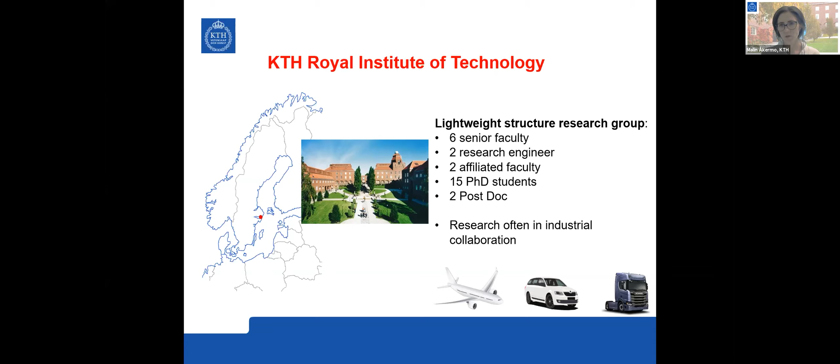We have 2 affiliated faculty from industry working closely with us, and roughly 15 PhD students and some postdocs. Some of the PhD students are also employed by industry, so we make no difference whether they are industrially employed or working at the campus full-time. We have all the same requirements for becoming a PhD. As Olle said, we often work in collaboration with industry and towards different applications.

I wrote this title for the presentation quite early, and now I have to live up to it. So I was thinking what to say, and we have heard quite a lot already, and I'm afraid some of that will be repeated with other words from me. Talking about composite manufacturing and future lightweight design, I think we all understand it needs to be cost effective. It has to include several different materials, still ensure sustainability, and in the future it also has to deal with multifunctional materials and structures.

So with that said, these are the 3 topics that I will actually talk about, trying to explain how I see these things today and in the future, what we do today and what we will do based on what we have learned.

So we will talk about cost effectiveness to start with. We are a university, we do not know a lot about what it costs to have an industrial application, of course. But in order to understand what is important to work with, we have had a research program around predictive technical cost modeling, where we try to see what kind of different manufacturing processes there are and what can be produced with them, how fast are they, how many components can we make an hour, depending on how complex the geometries are, and make a cost model based on that.

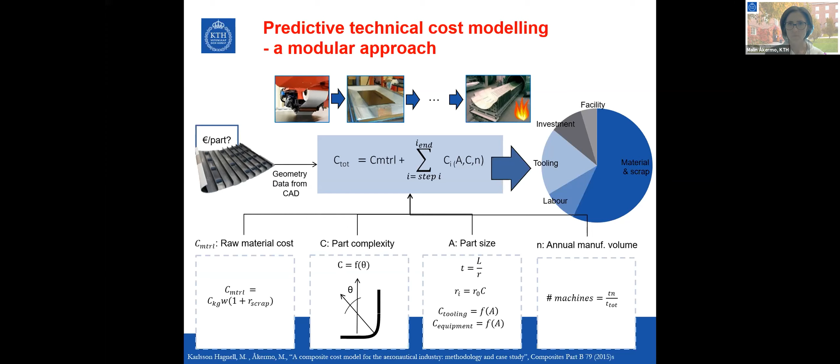So to me, cost effectiveness is to find the right level of automation for the material, geometry, and production volume required, and I think that's what we have heard with different words during these presentations. When you have that level of automation that is best for you, you need to learn the process window for that process so you can really use it to its full potential.

And then also, of course, ensure robust manufacturing and small geometrical tolerances to enable low-cost assembly.

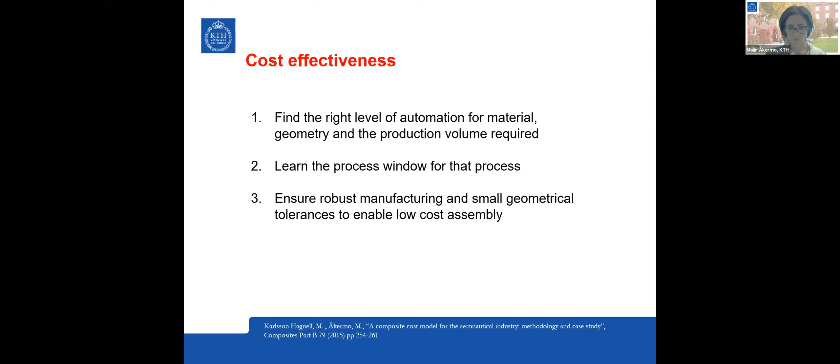So now I will come deeper into these points, telling what we did, how we started, and where we are going right now. Although we said that we work towards different industrial disciplines, I think lately, since I started at KTH, we have worked mostly towards aerospace components. Therefore, I will start with a typical aerospace geometry, and we will look at how we have worked on the kind of automation around that.

To us, a typical aerospace geometry is quite large. It has a flat outer surface and a lot of stiffeners, which include ramp areas, recess areas, and convex areas. So the flat area itself is fairly simple, while the different geometries can be quite complex. You see there what we call the test geometry—we also call it the Per beam, because of the PhD student who started working with it. That geometry will follow through this presentation.

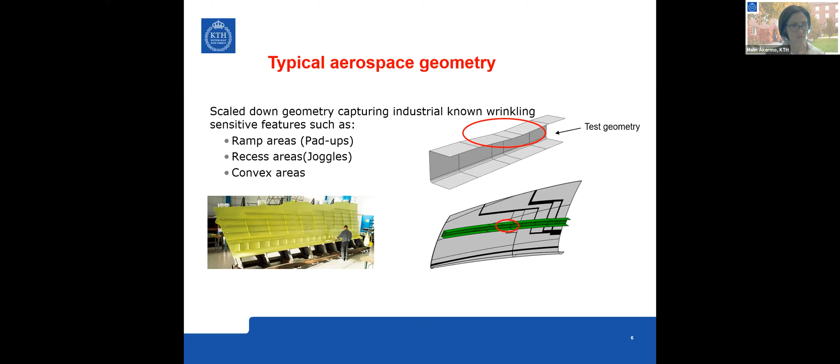The level of automation we have been looking into for this particular case with the surface and the stiffeners is that we make multi-layer layups using an ATL or AFP flatly. The outer surface can be made directly, of course, but we focus here on the spars.

They can be laid up flatly and then afterwards formed in something called Hot Drape Forming, which is a process where you put your material as a stack on the tool, with a rubber. You heat up the whole thing, and when you have the right forming temperature, you take out the air, and the pressure from the rubber will form the geometry towards the stack.

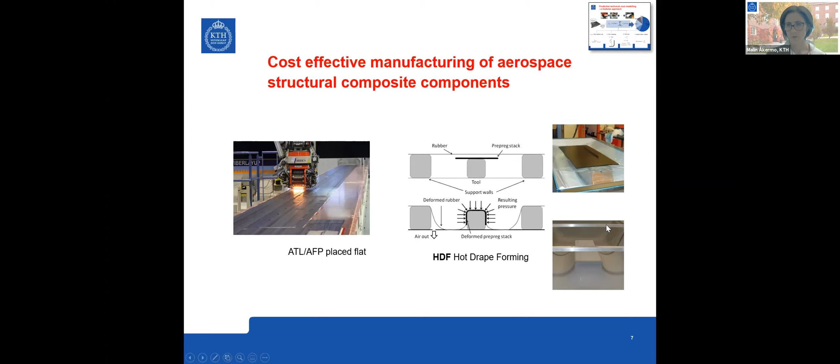You see pictures here to the right. The aim of this is to produce wrinkle-free and robust manufacturing. It's very efficient, and you do it the same way every time, so it's not labor dependent.

This is a technique that Saab has been using since 1980 in different fighter programs, but with time, more complex geometries have come into focus.

When we started looking into this, we had this particular case with the beam, where we saw that if you have a 45 plus minus 45 layup, as in the top figure there, and do a Hot Drape Forming, we get a really nice geometry. The beam is flat, but it has a recess zone here, meaning all the material formed down from that side and towards this will be under tension here.

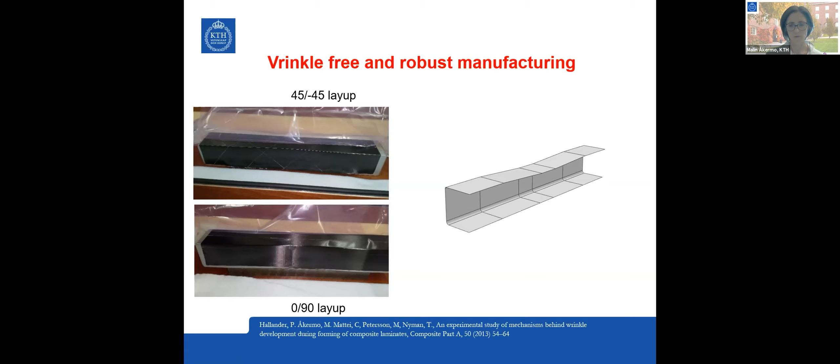We also saw that if you have a 0 or 0-90 layup, you got really nice geometry afterwards. However, if you stack those two layers together, plus 45 minus 45 with 0-90, the forming comes out with severe wrinkles.

So these wrinkles do not depend on too much material in this area, not primarily at least, since this distance is longer than that distance. So the wrinkles come from the different movement of the different layers.

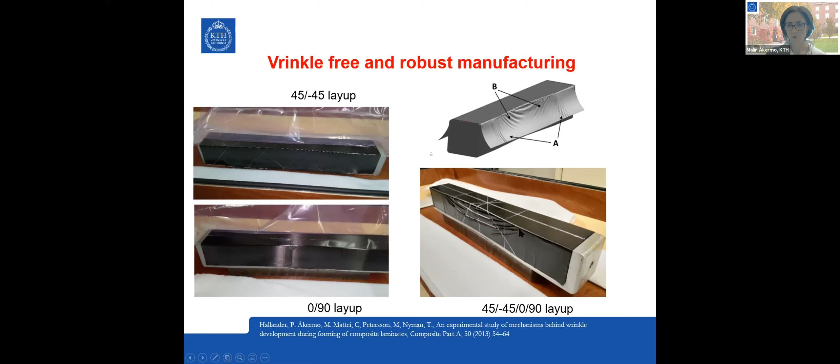We have defined different kinds of wrinkles, including micro wrinkles that depend on how these layers interact at the micro level. Based on this, we started looking into the forming mechanism, trying to understand why this is happening.

We have mainly looked at interply properties, the properties in between the layers, and how the material shears. We developed a material model and put that into forming codes.

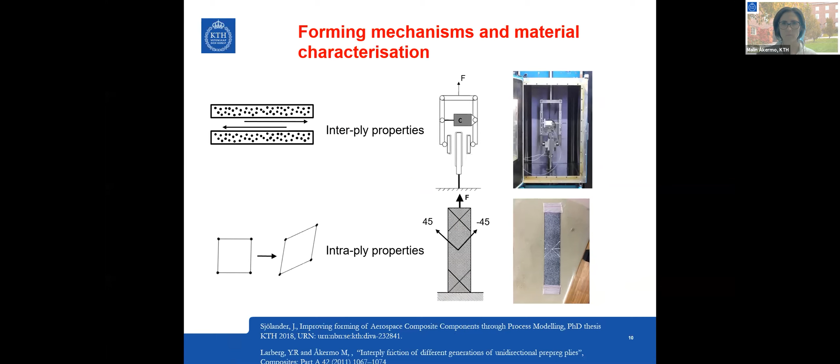We used the AniForm composite forming simulation tools and developed detailed material models, being able to both predict wrinkles, as you can see here, the very small wrinkles on the inner side.

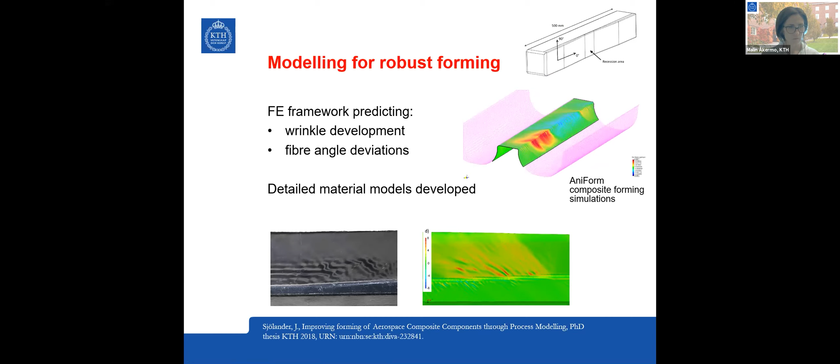We can see them as stress levels in the simulations, but also see exactly which kind of fiber angles come out after forming. Based on that, we can actually understand and predict why this behavior happens.

We saw that if we have 45 minus 45 and 0-90, and you form the pairs separately, you have no wrinkles. But if you start putting them together, you will have wrinkles.

We could also simulate and show that instead of forming 2 layers at a time, if we put everyone together but forced the layers we knew gave good results to work together, trying to make the interface between the different stackings weaker, we could achieve the same good geometry as when we did them 2 by 2.

So the simulation could help us understand what happens, and we could verify it. This is quite important for the future, so that we can use the simulation before doing a lot of experiments, and use them early in the manufacturing phase.

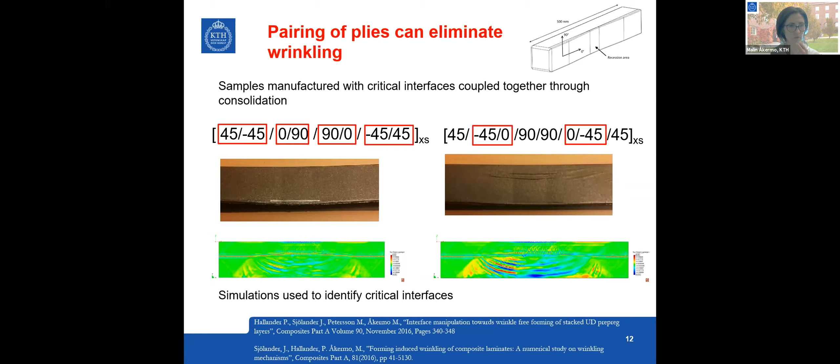Based on this, once we understood how everything was happening, we started looking into robotized forming, because a lot of geometries are still produced manually in the workshop today. It's quite heavy work for those doing it, and it's a quite bad work environment - they can be really worn out in parts of their bodies.

So we started looking into the initial structure we had, the beam, which we knew gave wrinkles in certain layups. We thought that since the hot drape forming technology is not that easy to steer, the rubber goes down and the material follows.

If we instead could find a better forming method, a forming order with a robot, we could avoid these wrinkles. So that is what we did. We did the bad stacking without any twisting of the interfaces, and we predicted how the robot should move in order to avoid wrinkles. We managed that way to produce a geometry which was 5 millimeter thick, I think 16 plies or something, without any wrinkles. So this could be a way of releasing the work for people in the workshop for those applications when you cannot use hot drape forming.

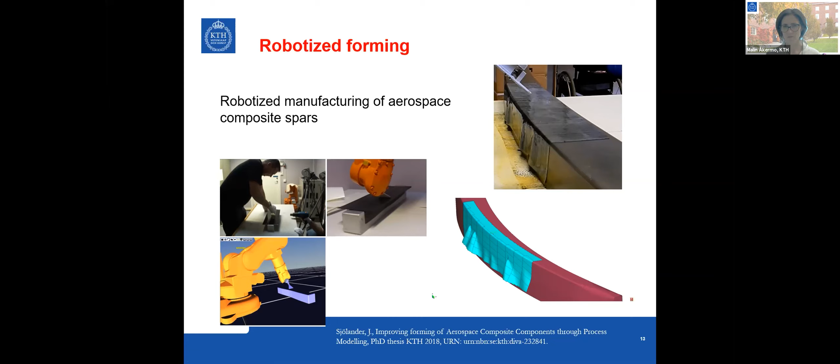So where do we go now with our technology that we've developed, the forming simulations and the understanding of the mechanisms? Well, the next thing happening here right now is...

We are collaborating with Volvo Cars, who are designing the Polestar car. Polestar is its own brand within the Geely family, as well as Volvo, but they are doing this design. You can see that in the bottom plate, the lower part of the structure is very similar, the Polestar 1, to the Volvo platform. It has, however, a few carbon fiber reinforced plastic parts, and the upper body is also made from carbon fiber composite materials, which is put together adhesively.

So this is not a car I can afford. There's another Polestar 2, which is mostly metal, which is a little bit more affordable. So these are all electrical automotives.

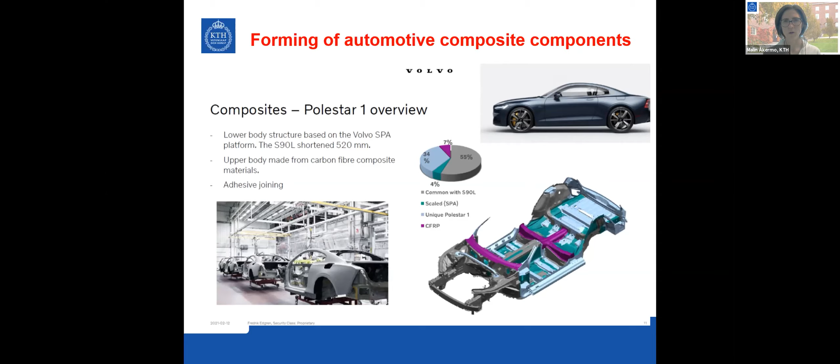However, the requirements from Volvo are quite big. I mean, these are the kind of simulations and tests they are doing. They are testing, of course, a lot of cars, which is costly, but in their design, they must be able to predict what will happen. So the simulations are there first, and then they just verify that the simulations are correct.

And in these simulations, they must have the correct fiber angles, and they need to know if they have some fiber waviness here and there after press forming. So right now we are looking into how to give them better material models for pre-preg press forming, so they can put that into their modeling framework for crash simulations and component design.

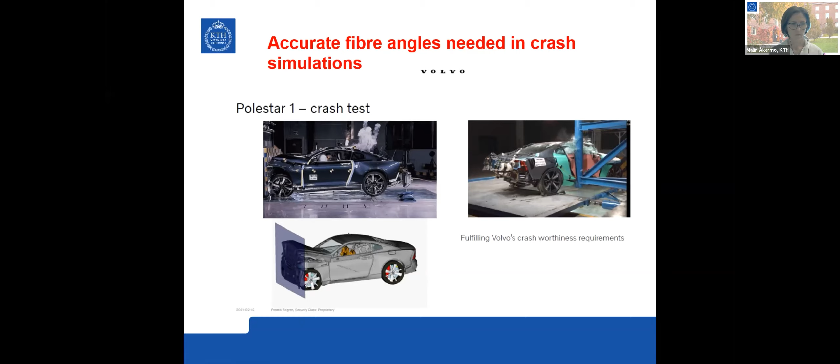So when we did understand a little bit more of how this worked, how the forming, why we got wrinkles, etc.

When we did hot drape forming, we felt that, well, why can't we push this a little bit harder? I said before, you should find a processing window for your application, your automation process. So we started looking into whether there was a possibility to, instead of having the hot drape former, use a Quintus press, which is very similar, but instead of evacuating the air, you are actually using oil to press the membrane down towards the tool. So it goes very fast and you get a really high pressure.

And the hope with this technology was both to be able to produce components faster, but also, since we had such high pressure, we were hoping that the voids would disappear, so we didn't need to go to autoclave for curing.

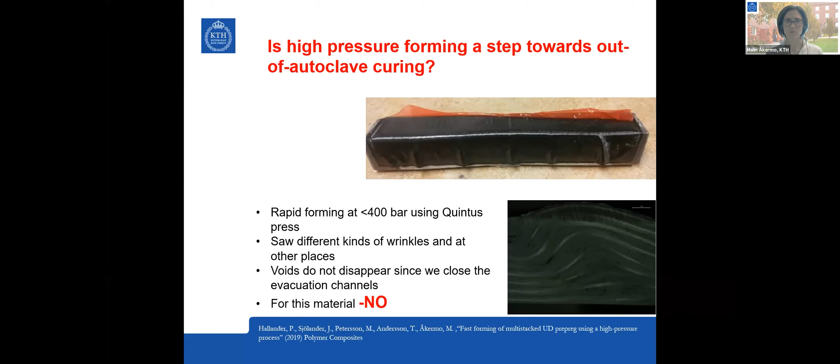When you had that, I said that you need to ensure that you have a good robust process and that the different parts fit well together. I'm basing that on the predictive cost modeling tools that we developed - we also looked at the assembly process. When you have an assembly like this with a lot of different spars that has to fit well together, it's easy that small shape distortion or radius thinning will make the fit not good enough, and you have to go to other activities to ensure that they fit within aerospace standard. We saw that actually, if you have to do this, it adds up to 30% of the total part cost. So this is important, of course.

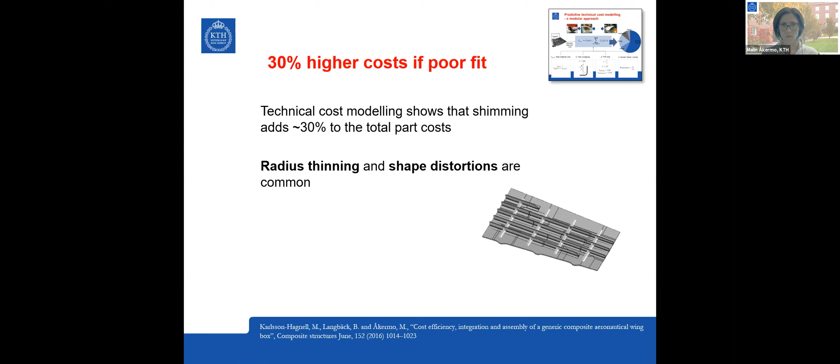Since we were mainly looking at the hot drape forming process, we started looking at what happened there. We found that when you form different thicknesses of material, so hot drape forming 8 plies, 16 plies, or 32 plies, at different radiuses using hot drape forming, we have the 2 millimeter radius and 6 millimeter radius. We could see that we had a certain change in thickness, which was quite large during the forming, if you compare it to the uncured thickness.

During curing, you also had a small change in thickness, but it was not at all as large as during forming. The total afterwards was often quite close to the thinning that we got during forming.

So with that said, we do not need to put a lot of effort into the bagging during curing, because you always have to do that - that was a bad way of saying it. The focus here is to understand that the thinning has already happened during forming. So if it happens during forming, we also need to understand how we can avoid it.

Looking at one of the pictures - this is a really bad picture from a high pressure forming experience - if you start looking into different thicknesses of the layers here, you find that where you have the fibers going in this direction, the thickness has to remain more or less the same, because it's difficult to move these fibers. While the other layers, where you have fibers going into the picture, so to speak, they had a tendency to move during the forming operation.

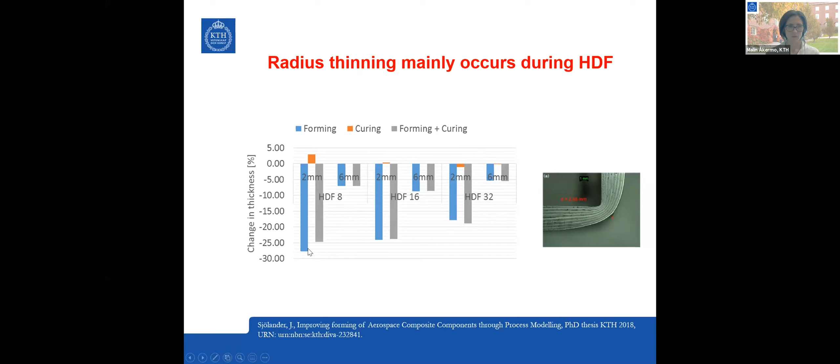This study has boiled down to a conclusion where we've decided that for these kinds of beams that we are producing, you should actually only heat as much as you need at the area where you need it. So heat the flanges only, and if we then keep the radius cold, or at room temperature or even lower, we can actually maintain the thickness of the radius.

Since we only heat a very small fraction of the component, we can make the heating process much more effective. So heating simply the flanges in different ways, single-sided heated or double-sided heated, we have done heat transfer modeling to verify this - the studies we've done.

We see that we get much smaller radius thinning than we used to have - 4% - and we have reduced our heating time by up to 85%, while still having a robust production.

Now we are heating by doing conduction heating with heated plates. I can foresee that there is even more time to cut if you go for some other heating technology, perhaps local microwave heating, or even better, some induction heating using new technology available. But with this technology, simple conduction heating, you can gain quite a big cost reduction and improved quality, which is important.

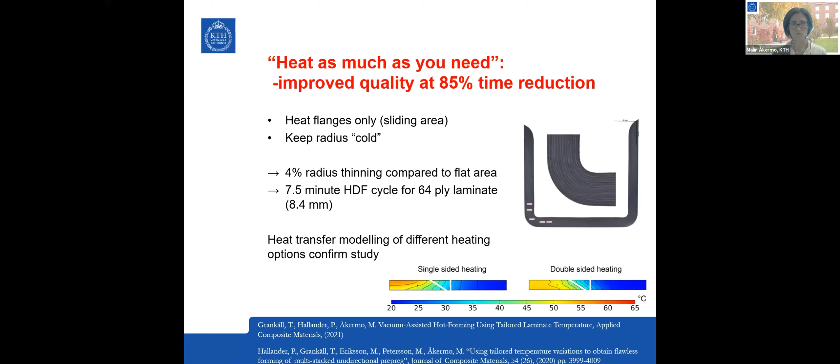The second step, considering having good control over geometry, considers producing these spars. If you have a lot of spars that you want to join, they can't have an outer surface that is rough.

And if you cure them on a male tool, a convex tool like this, it will have a bagging side here which is rough, and you will have poor fitting in between. It's preferable to cure it inside a female tool, having the outer surface shining and flat, and thereby be able to put them together.

However, the uncured thickness - if you lay up a lot of materials like this in the ATL or AFP, there is a bulk factor that remains after forming, which needs to be taken into consideration when you put it into the female mold. First of all, these steps from flat layup to putting it up on a convex mold are simple.

If you design this concave tool precisely the size that you have here, then you will get into troubles when you try to force it into the geometry. As soon as the material softens up and you debulk the material, you will lose the pressure.

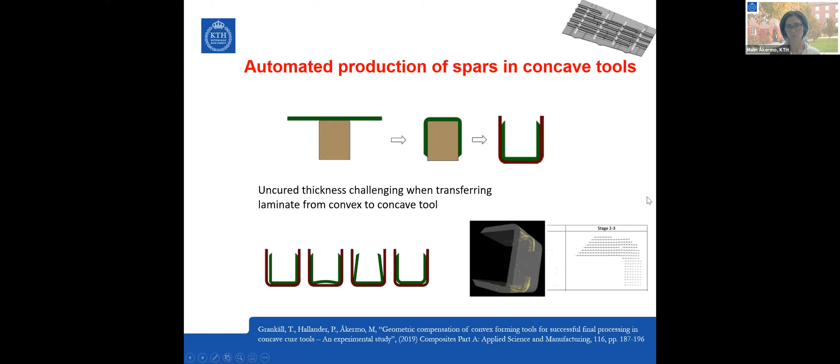So doing this, we could actually see that if you have a small gap and a slightly curved web, as we see here, the colors become more unified, which means it's a small difference in thickness afterwards, after curing, compared to the others. This scale here shows the thickness scale.

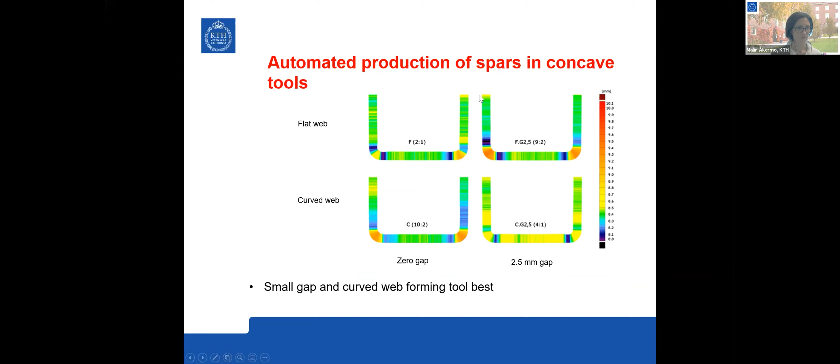Another way of ensuring that you have a good fit is, of course, to know the shape distortions and residual stresses, and we work in that area as well, but that's not mainly related to manufacturing science that precisely, so I will not go that deep into it.

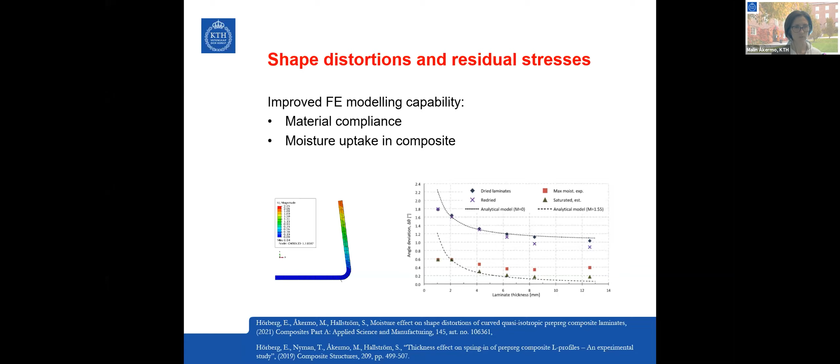What I'd like to say, however, is that we have looked into different kinds of tooling technologies and tooling geometries. Often you think that if you have a composite material which moves differently in-plane compared to out-of-plane, cure shrinkage and thermal expansion is totally different from the in-plane.

But normally what we used to say is that if you have a tool that behaves the same, this will not be an issue. The tool-part interaction will be reduced.

However, when we make a composite cure tool, we cannot make a tool that is only like a U-beam, as the component we want to produce. We need to stiffen it up with some backing structure.

Either we have a stiffening structure like this, like we have in this picture, which can be free to move a little bit, or it's 100% stiff. Or we can have a bend here on the surface, also providing a certain stiffness to the tool.

We have looked into these different options, different geometries, to see how they change their shape due to thermal expansion or thermal loads during curing and heating up, and how that influences the component geometry.

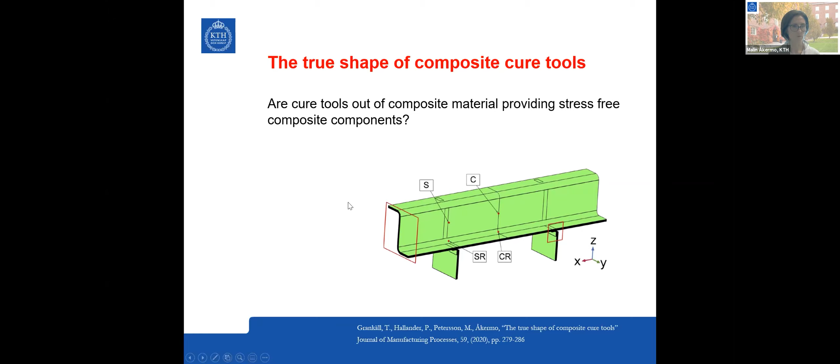We can find that compared to a simple L, which looks like that, depending on how hard you fit your backing structure with your curing structure, you will have quite high tooling stresses in your material.

And today, composite toolings are considered very good, but maybe not as durable as you would expect. We can actually see one of the reasons in this study.

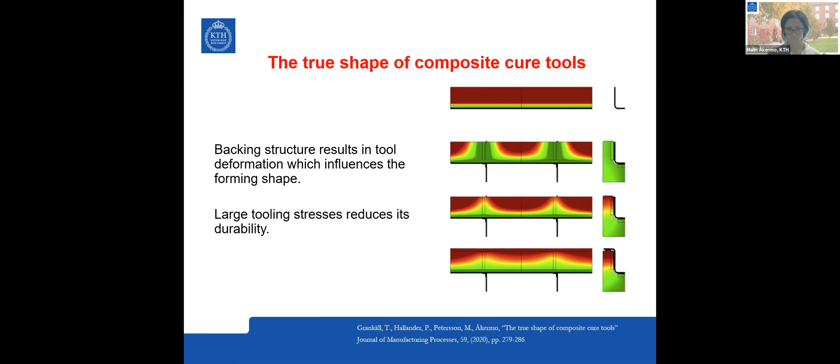Considering shape distortions and geometrical tolerances, we actually have a not automated, but very promising textile technique at KTH. It is a 3D weaving loom, which can produce 3D textiles in almost any geometry. It's totally integrated, all the fibers.

You can go from 2D to 3D in one weaving setup. So it's very flexible.

What we have used it for lately is to fill the T-joint sections called the noodle area or the fillets area, which is normally mainly filled with like a roll of prepreg or something. These fillets have a tendency, when you don't do it properly, to crack by thermal contractions and differences in thermal expansion.

We have seen that if you instead use the 3D woven fillets, they become thermally stable, since you have fibers in all directions, so it doesn't move that much as it would if you had only fibers in two directions. It becomes more durable, and we can make an automated and robust manufacturing route.

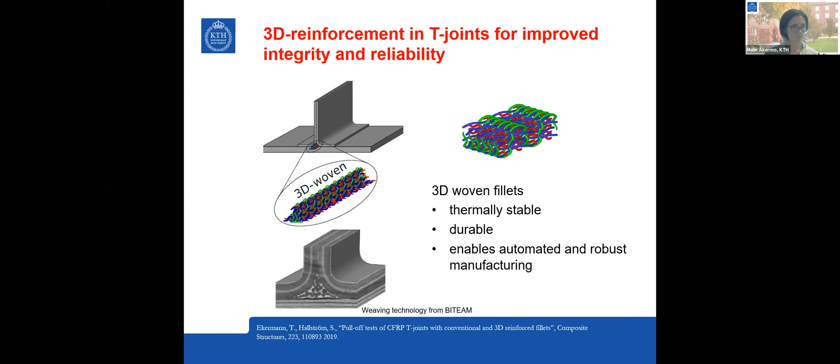We did an extension to our technical cost program, the cost modeling program, adding the framework of cost and weight optimization, adding a structural optimization model together with it. So looking into different options of making stiffened structures with different kinds of materials, doing an optimization route for that material to get the right properties, adding together the cost modeling software I told you about briefly in the beginning, in order to have the optimized low weight structure.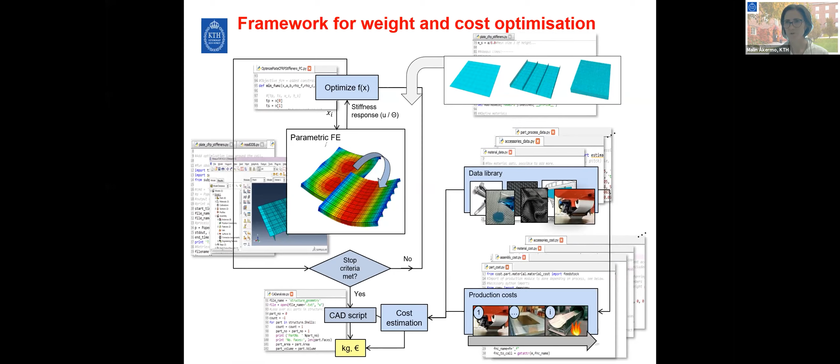I just want to show you that we did a case study looking into two different applications that are quite far away from each other. Both something that could be an aerospace component, where we have a high requirement on low allowed deflection. We had another case, a composite bottom plate for an automotive, designed for torsional stiffness instead. So we allowed 3 different levels of deflection, or 3 different levels of torsional stiffness, with the different designs you see here: the sandwich plate, the stiffened composite plate, and the pure composite plate, and tried to find the cost and weight.

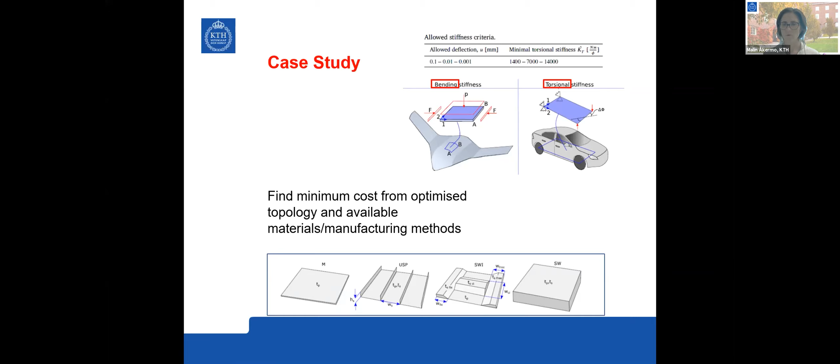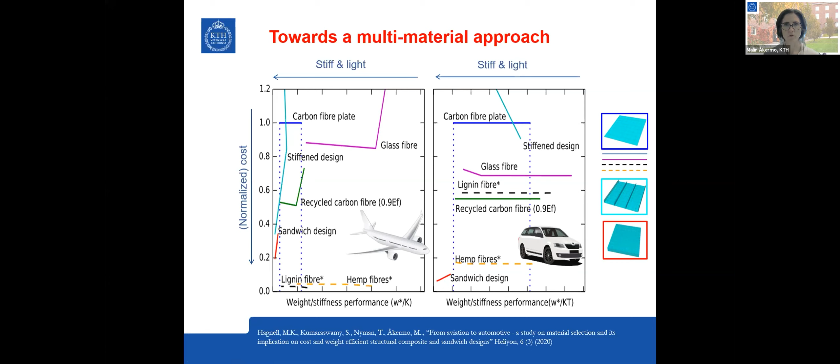So today in the existing framework, we are minimizing the cost. But what we're planning to do now is instead minimize the energy consumption or perhaps the carbon dioxide footprint. So instead of cost coming out, we have that measure put into the minimization, and we will have cost, weight and carbon dioxide footprint coming out as a measure.

It is interesting to notice that cost and sustainability often go hand in hand, since if you can reduce the heating of a certain material, you of course reduce production time and reduce the energy consumption, which also reduces both cost and carbon dioxide. So often looking for sustainability could also give you some more money back.

We have looked into recycled aerospace carbon epoxy and other grades to see if there is an economical and mechanical potential for recycling, just because we wanted to put a number on how much it would be worth and what kind of mechanical properties we could have from it, looking into literature and recent research, and we have put that into the framework already.

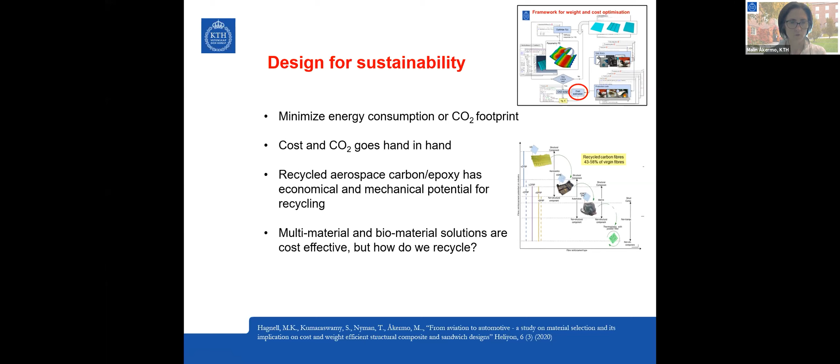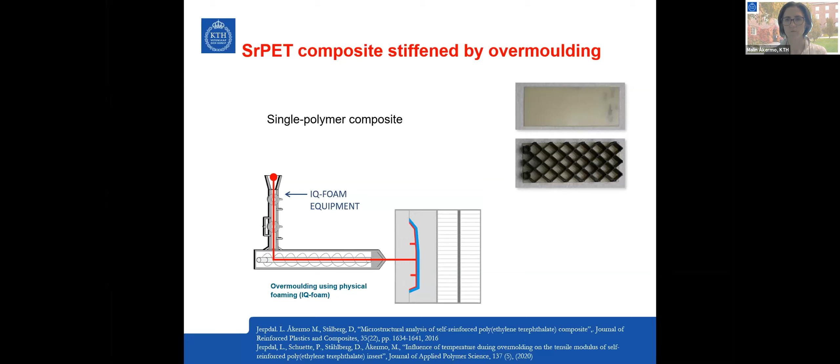One option would be to use a single material system as this one, where we have self-reinforced PET composite stiffened by overmolded PET, which has been done in a 2-operation step, where we do the composite plate first and the stiffeners by injection molding.

This has been studied for a wind deflector for a truck, having promising both weight reduction and cost using this particular material system. So the self-reinforced PET in this case would be both fibers, matrix, and the stiffeners, which means that we have a single polymer material that could be recycled afterwards.

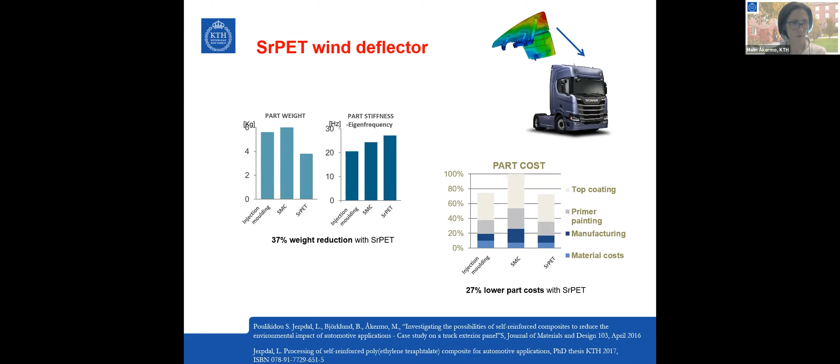Malin, we have quite a few questions for you as well, so I hope you... Yeah, I need to stop. I just want to say something about the very last thing. Which is about the multifunctional materials.

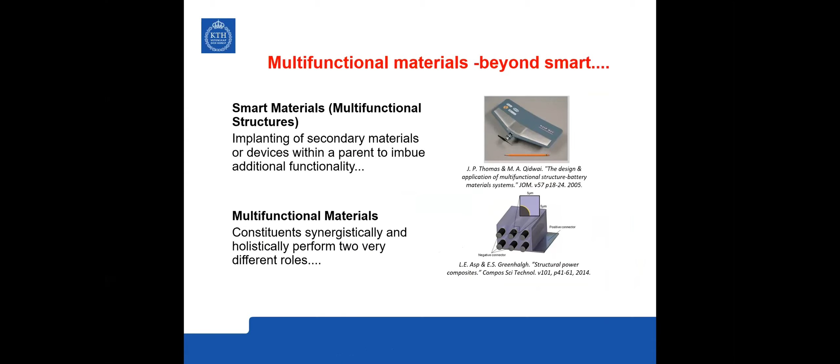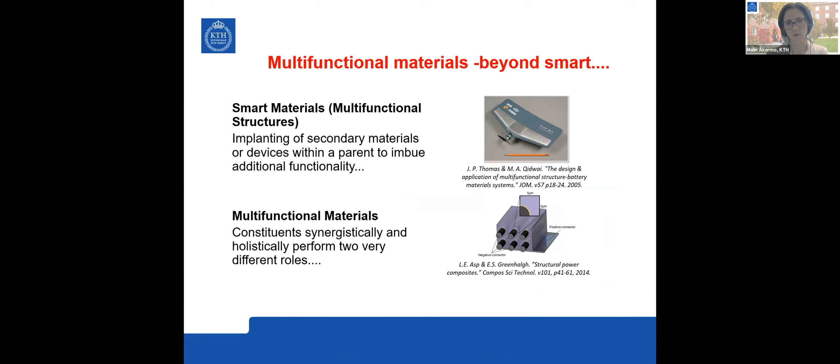I think in the future we need to consider using materials not only as a structure, but also for other things. And multifunctional materials means that you are utilizing it in a good way.

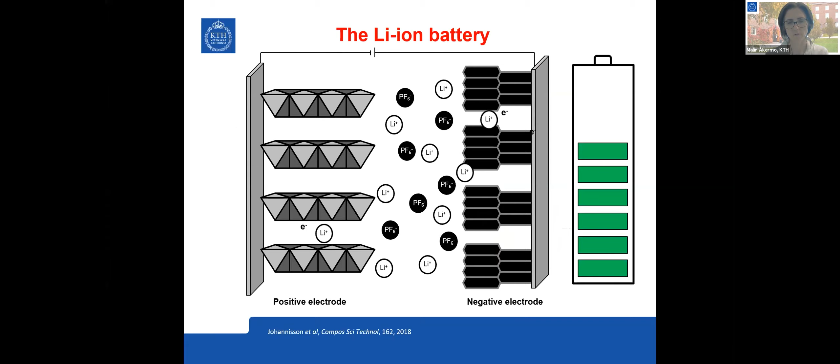What we are working on here is the lithium-ion battery, where a little bit of electricity can make the lithium go from the positive electrode to the negative electrode. And we are researching the possibilities of using carbon fibers and the polymer matrix to do so.

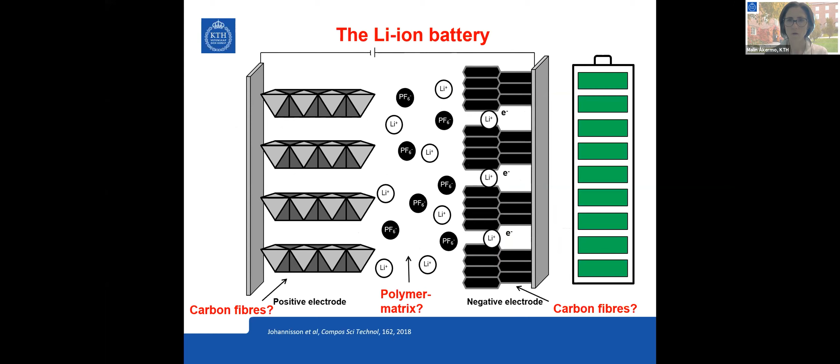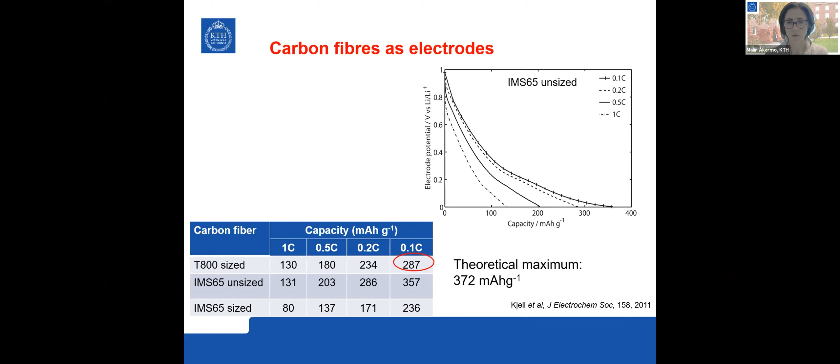We see that there is great potential for certain fiber systems, and particularly this one maybe, to be charged by lithium ions. We already have the system going where the matrix has been made stiff, so it's a load carrying system. And we are looking into the potential mass savings ranging from 5 to 65% for different applications.

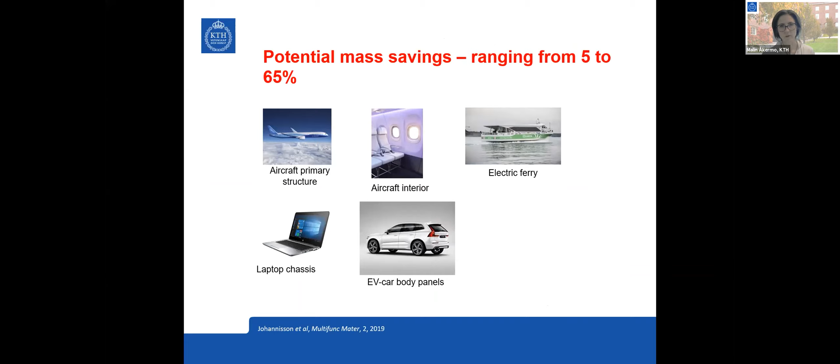On top of that, we are going to do a little bit more work on multifunctional materials. We see that they work as piezo-electrochemical sensors. They can be used as actuators, used for energy harvesting, etc. And that's quite futuristic, but it is something we have to consider and take into account in future manufacturing.

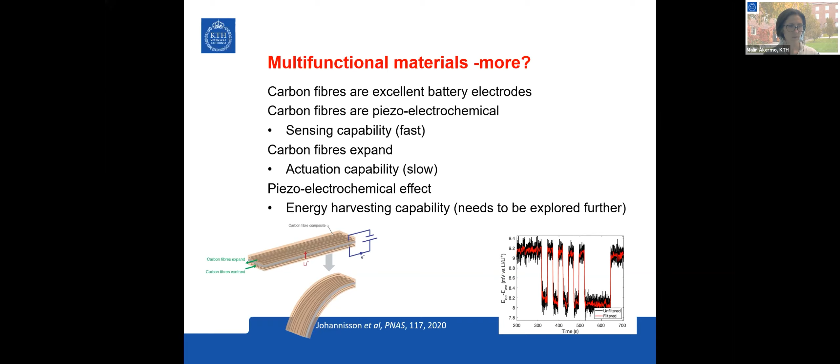I will skip that picture.

So to end, we have time for questions. Composite manufacturing in future lightweight design needs to be cost effective, have the right level of automation, expand that to its maximum point and make it robust. It will be used with several different materials.

I'm a little bit worried that we sometimes sub-optimize and think that biomaterials are the best. But when it comes to recycling a thermoset material with bio-based material, I find that could be also quite tricky. So maybe we make it difficult for ourselves if we do not look at the big picture.

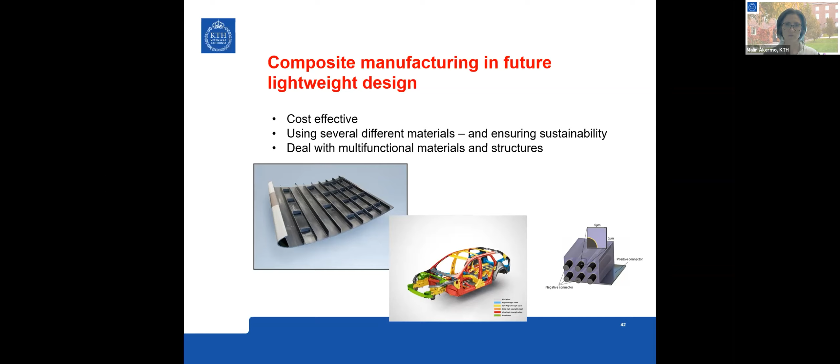We will have to deal with multifunctional materials and structures in the future, because these structural batteries, when they start existing as panels in our cars, that is something we need to deal with in manufacturing. I have put a link for inspiration that I will not show here, but it will follow the presentation. If you see it, you can have a look to see more about the structural batteries. I want to thank you all for listening, and thanks to my colleagues at KTH.